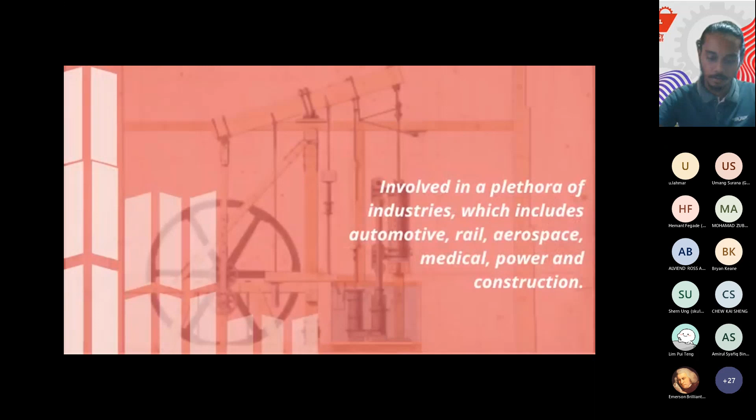Welcome to iMechie Nation. IMechE was established in 1847 by George Stephenson and has some of the world's greatest engineers in its history books. It is one of the fastest growing professional engineering institutions. Headquartered in London, we have operations around the world with members in more than 140 countries. We are involved in a plethora of industries, including automotive, rail, aerospace, medical, power, and construction. The Malaysian branch was incorporated in 1997 with the formation of a pro-tem committee with Professor Engineer Dr. Ong Kok Seng as the pro-tem chairman. Applications to the Malaysian Registrar of Society was approved in 2000 and the first inaugural meeting was held in January 2001. The branch has efficient business plans and a committee of dedicated volunteers to achieve the mission of the institution through the provision of networking, events, news, links with like-minded organizations, and opportunities for the local engineering community.

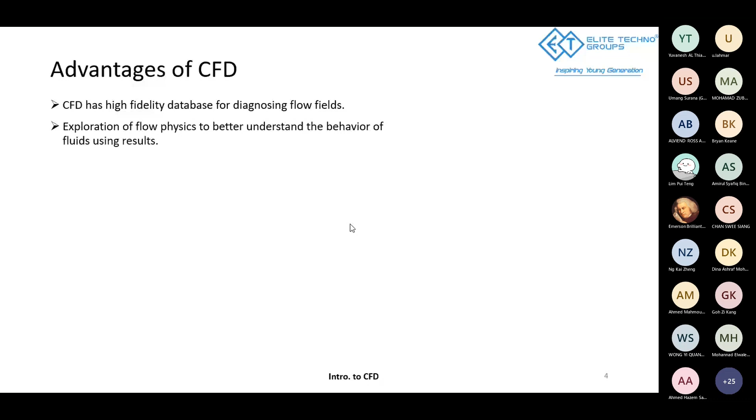Next is exploration of flow physics to better understand the behavior of fluids using results. Using CFD, you can explore different flow physics, from a simple example of fluid moving over a surface, to as large as Niagara Falls. You can actually simulate that extent of fluid flow and predict how the fluid will flow over a certain period of time, predicting the flow of the fluid in that domain using CFD. That is the extent of CFD. There are numerous possibilities using CFD. Whenever there is flow or fluid involved, there is CFD, giving you easier accessibility to better understand the behavior without having to invest a lot.

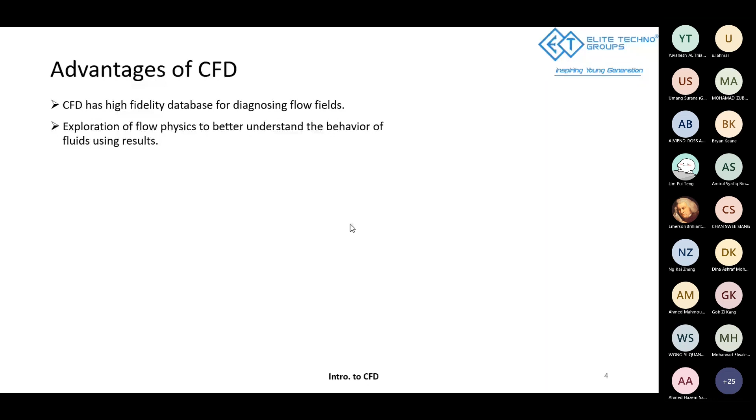Now, to understand this, let's take an example of fluid or air moving over a car. If a car is moving on a road at a particular speed, it will feel some drag or resistance from the air, which is called drag as a concept.

Imagine if a vehicle manufacturer does not have access to CFD. What he has to do is actually create a prototype experimentally, use a wind tunnel, place the vehicle in it, physically run the vehicle, and put sensors over the surface of the car to analyze on a real-time basis what the drag values or actual values are. Based on that, he has to remodify the design, recreate the prototype, and move ahead with this research until he reaches a satisfactory outcome.

But with CFD, you can just create a model of a car using CAD software, import it using a commercial software, and create this simulation. You can create a wind tunnel in the CFD domain and input conditions for your speed, where you can easily simulate and understand it with less time, less cost, and less investment of your own effort. It will give approximate results, but enough to understand the flow physics and how exactly the fluid is behaving.

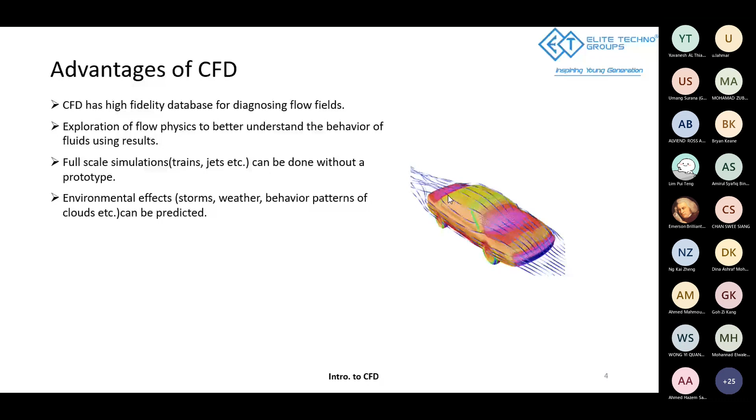Coming back to the other point I was mentioning, that is hazards involving CFD, EFD - experimental fluid dynamics, where you have to create simulation models and actually manually manufacture prototypes. You can avoid all those processes using CFD.

The major hazard is that manufacturing processes cause pollution or adverse effects on nature and the environment. This can be cut down by using CFD, where you reduce the process of remodification and redesign, and predict the flow behavior and outcome as a starting point to create your actual vehicle or component. That way, I'd say 70% of your hazards would be reduced by using CFD.

Now let's come to complex physics. Some of the complex physics, like movement of stars, planetary boundary layers, or stellar revolutions in space exploration - how a planet will move, how Earth will move with respect to the Sun in a couple of months, and at what position it will be - all those things you can actually predict using CFD.

You can actually create a small environment in CFD. You can actually create a domain in CFD which represents those properties. So that is the extent to which CFD goes.

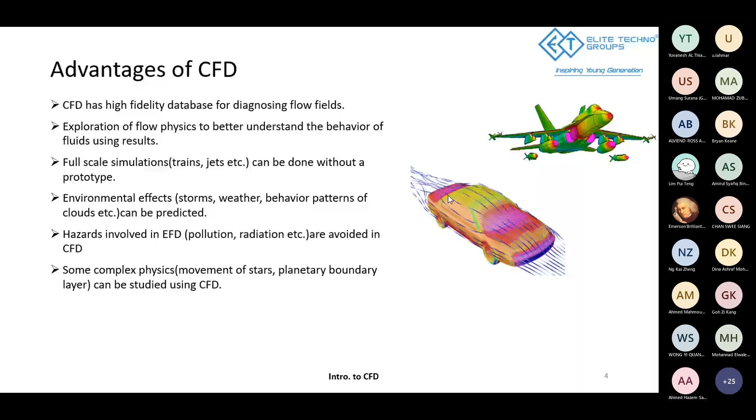Now let's focus on how a CFD code works and how a CFD algorithm is formed. The first step is that CFD codes are structured around numerical algorithms that can tackle fluid flow problems.

Different applications have different equations governing them. All these governing equations are categorized and generalized, and using them, different models are developed mathematically first. Then, using computer coding, these mathematical models are converted to computer codes which run using iterative methods to solve different fluid flow problems. They only need some input conditions for different parameters as a first guess, and iteratively they solve until they reach a conclusion.

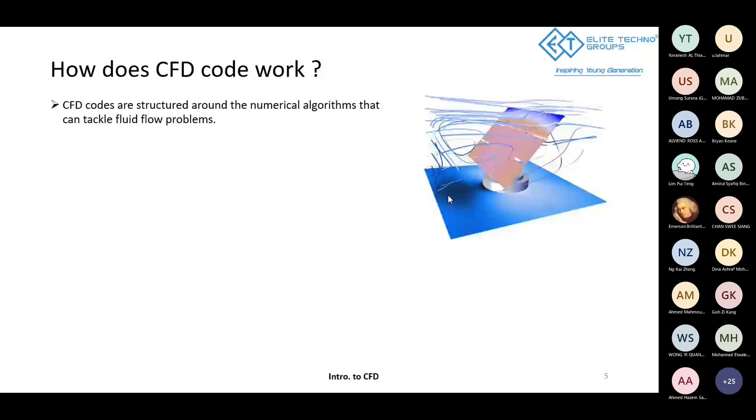Now, the analysis begins with a mathematical model of the physical problem. As I've told you, if you take a simple physical problem like heating of an object, it involves convection heat. Based on the nature of heating, it will also involve conduction. Based on different parameters of heat transfer, it will involve energy transfer, continuity, and momentum.

So all of these parameters will be analyzed. All of these equations will be applied or used to construct a mathematical model of the physical problem, which can accurately represent it.

Now, there's one small thing - we cannot exactly represent a physical model in the mathematical model, because there are a lot of parameters that vary in different ways. Like pressure, if there are entities that are time-dependent or compressible, it becomes very difficult to model a physical problem accurately using mathematical models. But we can model these physical problems to some extent by making assumptions and creating an actual model for that.

Then all of these equations must be satisfied throughout the region when a mathematical model is created for that particular physical problem. Apart from that, all these fluid properties are to be modeled empirically. It depends on what fluid you're using, how many properties you're analyzing, and what different properties you want. Based on your requirement, you will be able to apply these properties.

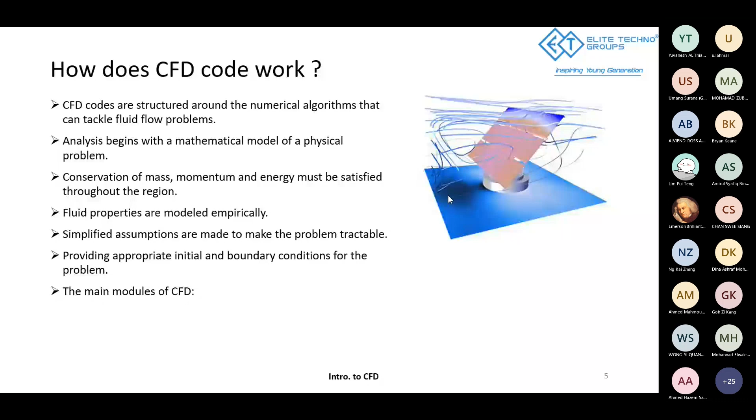So that is the primary idea of how CFD code works. After providing the initial and boundary conditions, the solver will solve and generate results for you, and those results will be the basis for you to analyze the problem and compare it with theoretical analysis, with theoretical terms, where you can learn.

Now let's consider the main modules of CFD. The first is pre-processing, the second is solving, and third is post-processing. Considering all of these processes, CFD is divided into these three modules, and we'll see with respect to a commercial tool how these models are considered, or how we can use this in a commercial tool, because there is a huge difference between going for commercial tools and developing your own code for CFD.

So those are two different things, and there is a huge gap, because for commercial tools you will have direct features which you can use. You can click on those features and they will be activated. The program will automatically run in the background, the back end of the system, and that way you'll have the solution. So using commercial tools, you only need to understand how the tool works in the back end, how, if I apply a particular model, how it will solve, and whether it will be suitable for my model or not. All of these things you'll take care of when you are actually going for commercial tools.

If you are going for developing tools, or if you ought to develop your own code for a particular problem that seems untractable, in that case you have to physically develop a mathematical model for that problem theoretically first, then convert it into a numerical model, and convert it into a Jacobian matrix, or a Gaussian matrix that defines that equation, and governs all the parameters I've spoken about before. Then, using those as input, you'd create a flow chart, write a code based on that, and run that code for your desired solution.

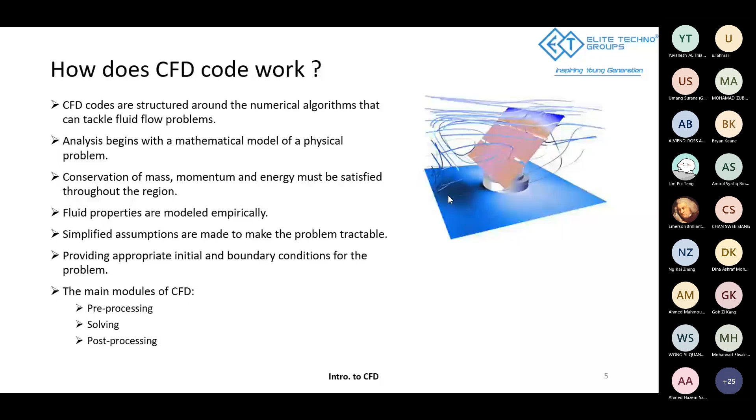So that was about that. Now let's jump into the CFD process. So CFD process in respect to commercial tool is covered as, you'd be first making the geometry using CAD software, or you'd be having a ready-made CAD geometry given by an expert, by the engineer or design engineer that is working with it.

Generally in industry there are different roles for different people. A design engineer works on a model, and he delivers that model to the analysis engineer. The analysis engineer takes the model, simplifies it according to his needs and the physical phenomena he has to operate on, repairs some of the contents of the model, and then does the meshing and all. So that's the context of things.

Now, first, for practice purposes, you'd be making geometry, then meshing the geometry, then setting up physics. In setting up physics, you'd be applying all the boundary conditions, setting up the whole case. Then in solution, you'd be running the solution in iteration and calculation by just clicking a calculate button on the commercial tool. After the solution is completely done by the computer, you'd go to the results for post-processing. In post-processing, there are different tools involved, which we'll see when we talk in detail about each of these modules.

So let's see how the segregation is done based on the three main modules: pre-processing, solving, and post-processing. In pre-processing, the making of geometry, geometry cleanup and preparation, and meshing are considered. In solving, the setting of physics and the solution part is there. In post-processing, based on your calculated results, you'll be creating data reports, deducing conclusions, and arriving at a particular solution to the problem you are solving. That covers post-processing.

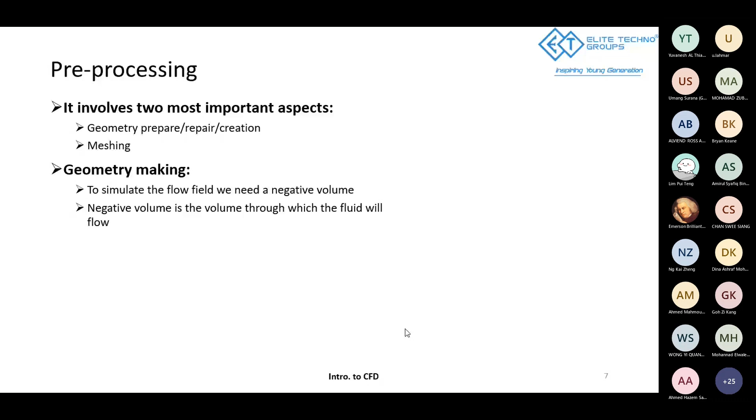Now, based on this negative volume, there are also two types of fluid flow. The two types of simulations can be set up during the geometry making itself. First is an external flow simulation, and second is an internal flow simulation.

For external flow simulation, you would have to create a box around this particular ship. So for this ship analysis, when the ship is moving over the waters, I need to understand how much resistance it feels when moving at a certain speed through the waters or through the domain. The bottom surface part is what I'm assuming is not actually in contact with the water, but in contact with air.

So I'm considering air as a fluid for my simulation, and I have constructed this domain to simulate this flow, where at this point will be my inlet, and at this point will be my outlet. My air will flow from this point and go out, and this basic consideration would be made while creating a domain and while making it visible. So this is done for external flows.

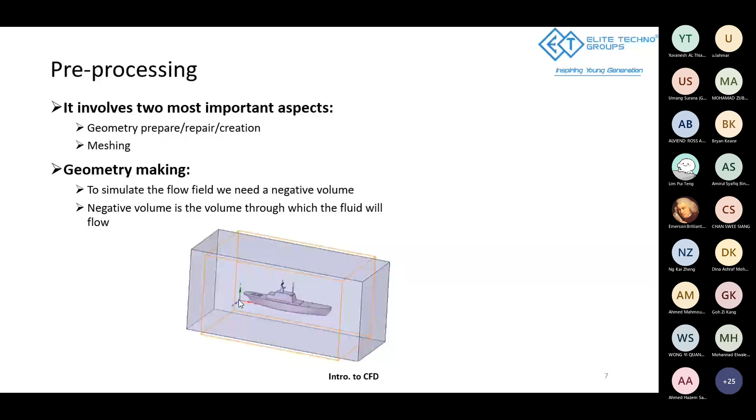Now, what is done for internal flows? If you are seeing this application for turbocharger, you'll be able to see that the fluid is moving inside a component, and there is also another component that is rotating, a rotating part of the component mentioned here. In that case, whatever the vacuum that you are seeing apart from this component, that is your negative volume.

Basically, that is your fluid volume, which you are going to analyze for, and which you need to extract while you're preparing for your simulation. Because essentially there are different factors associated with this when you are setting up this flow, setting up this fluid. You'd consider a few parameters like the structural wall of this inside component.

Only a thin surface of the structural component is considered for the analysis, and not the whole part, so that it's a surface which represents that particular component. The inside of the component is also not considered throughout the simulation, so it won't be affecting our simulation part. So while you are dealing with fluid, you'd be only dealing with fluids, and the geometry making is done in these terms. You'd be creating the geometry.

So basically, all these concepts you'll understand much more clearly when we go for our GUI session, and when we go in depth about our Fluent session, tomorrow's session for cooling fan study.

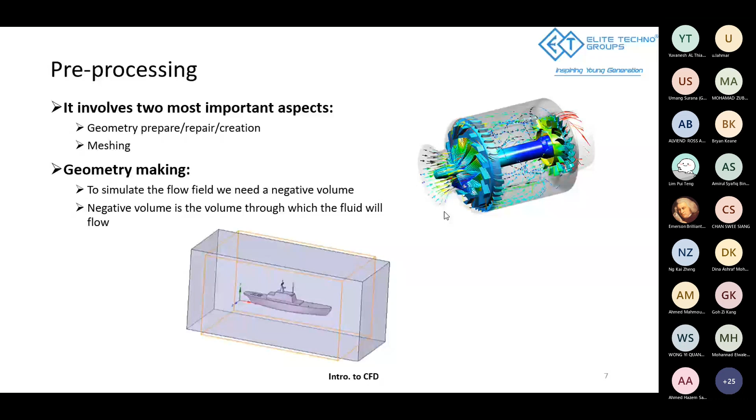Now let's come to generating a mesh. A mesh is basically, once the negative geometry, once the model is provided to the software, it is meshed through various processes. It's kind of dividing a particular model into different parts, and those parts are used to analyze a process. So the part of making these small elements, making a particular whole model into small elements, is what is called a mesh.

When generating a mesh, the only idea is that you'd be focusing on the controlling part of the mesh, focusing on the important region where you'd be having a denser mesh, and different components that make you interested, your regions of interest throughout the model. Even if you create a whole domain, you would have regions where your focus will be, where you'd be densing, creating these small elements in more frequency at that particular point, rather than focusing on the other parts of the model.

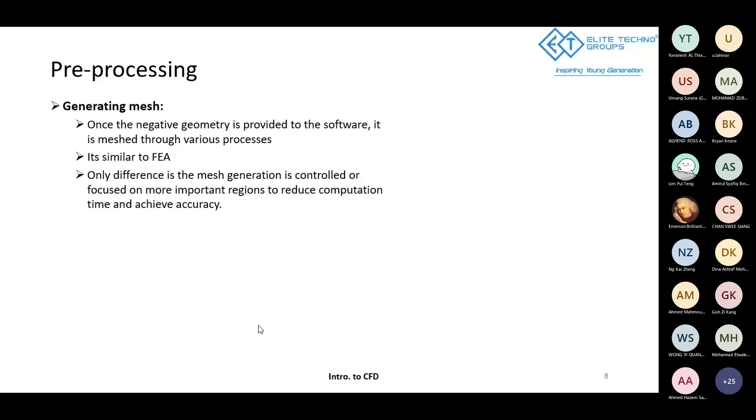To clarify this point in detail, you'll be seeing this 2D geometry of a car model. This is a surface where I have drawn this vacuum space for a car. This region is because I'm flowing it for external flow, and the solid part you're seeing is representing my fluid domain, where the fluid flow will be. My fluid flow will be coming in this direction and going in this direction. So accordingly, I have created the geometry, and I want to mesh it now.

So basically, on this surface, I will be creating small elements like this, as you are seeing, and at each of these elements, CFD uses the finite volume method, which treats these cells as volumes.

For 2D, it treats it as a rectangle, but for 3D, it treats it as a cubical volume. It will have a center point, let's consider this point. At center, it will have a node point at which it will be computing all the properties related to this particular section or element. This node will represent all the properties of fluid moving through this domain at that point for this small element.

Same thing will go for this element, and for this element. Using the reference of the previous element as a first guess, the solution for the next element will be calculated.

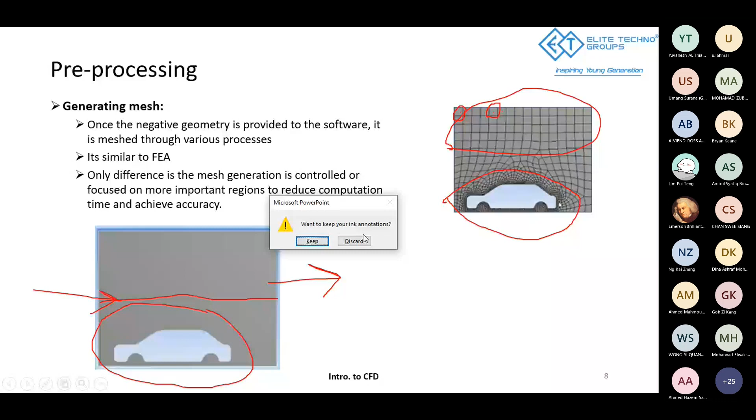This, by the way, depends on different analyses, different applications, and what outcomes are expected from an analysis. Based on that, the meshing strategy would be considered.

Now let's come to the solving part. The solving part consists of setting up physics and solution calculation. In setting up physics, you would have to apply boundary conditions to the meshed models. So whatever meshing you have done, to that meshing you would apply the physical constraints, like the solution equations for continuity, momentum, and the solution equations for turbulence if it is to be modeled.

Along with the boundary values, like what is the inlet velocity, what is the velocity of the wind blowing over the car, so something in regards to that we have to apply. Apart from this, you'd have to select appropriate values for boundary conditions that mimic the real life condition, such as if it's an internal flow or an external flow. Based on the application, you have to apply these boundary conditions.

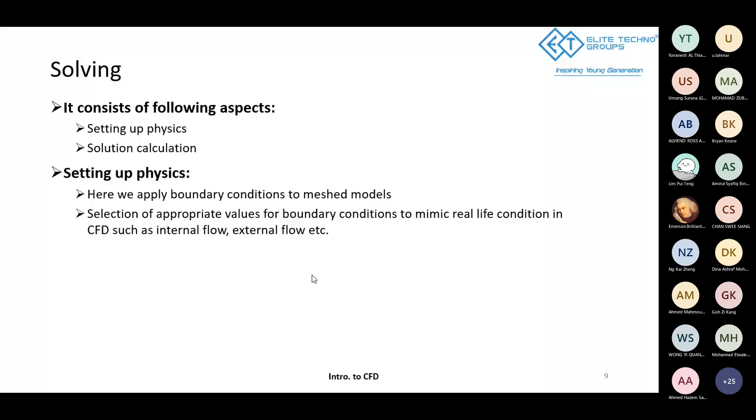Also, you can add conditions like if the flow is to be turbulent, or if you need gravity involved governing your flow, then you have to add these properties while solving. Some extra inputs might be needed to express the situation, such as when calculating for drag, you have to monitor the drag, or if you want to generate a specific level of drag, the whole simulation can be set up so you define a property which governs the overall simulation outcome.

So basically, if you are set on achieving a particular value for a particular component, you can set it, and based on that, the solution will run iteratively, solving for that value. But in that case it may take months, weeks, even years, because it's an approximate situation, and all numerical simulations give an approximate result. To obtain an exact solution is really impossible, considering all these parameters and the limitations we have with our physics.

Then you'd also be applying materials to the domain, setting the type of analysis, and defining the symmetry.

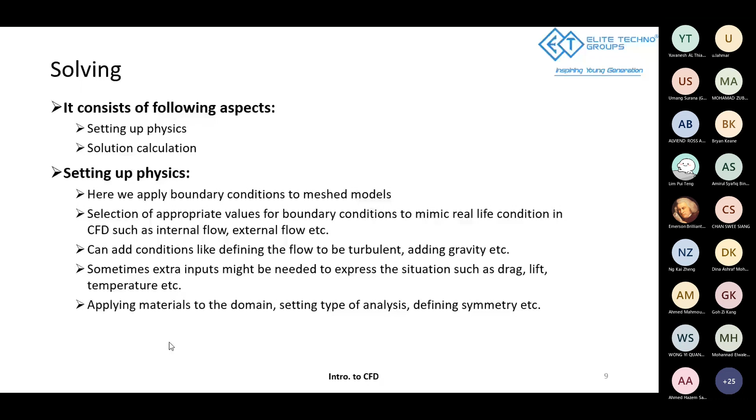Now, the solution calculation part. Here, selection of governing equations is done and applied to a mathematical model. Then convergence criteria is set up in this step. The convergence criteria basically means you're setting up an accuracy criteria, which if achieved, stops the iteration - because there are millions of simulations or iterations being done. So what governs when it will stop, in case you run a CFD simulation and are unable to stop it? To avoid those scenarios, there is a convergence criteria, which once achieved, defines your accuracy.

Convergence criteria is defined by two parameters. The first is the solution you get using two successive iterations. So if I'm solving for a particular property, let's say pressure, for the first iteration I get a value of 10 pascals - assuming you're familiar with SI units, or we can consider it as bar. For the next immediate successive iteration, it gives me a solution of 9.80 pascals or something, and similarly it goes on reducing at a particular point where the difference is very minimal between two successive iterations, within the limits of what convergence criteria I have set up.

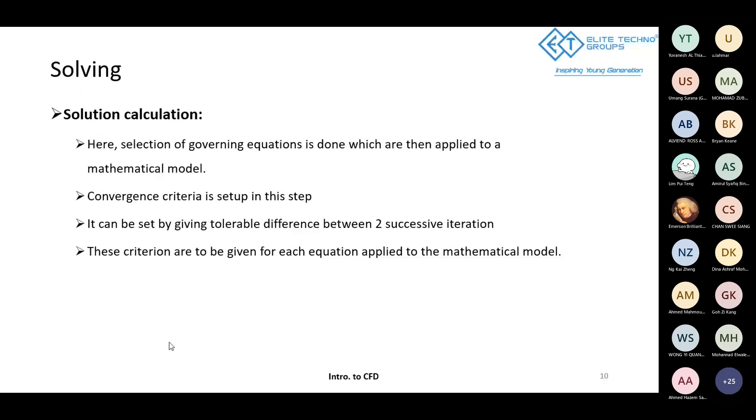Then you'd be setting up the maximum number of iterations. This is another limiter you add for avoiding an infinite number of iterations in a CFD solution.

When you apply maximum number of iterations, say 100, my simulation will solve for 100 iterations, solving the small tiny element we've seen until it gets the proper value. Based on the initial guess, it solves based on the number of iterations along with the step size. I'll come back in detail when we see the Fluent GUI. But for reference, imagine 100 iterations for this element, 100 for that, and if there are 100,000 elements, then 100,000 multiplied by 100 iterations - that's the amount of iterations the solution will solve.

If I add control over the step size, it will again multiply, and the solution iteration number will increase and skyrocket. This is why, for actual real problems, you get millions and millions of iterations to get accurate solutions, and it can take months or maybe years to get a proper solution. Now that was about the solving part, how the processor works. Let's consider the post-processing part.

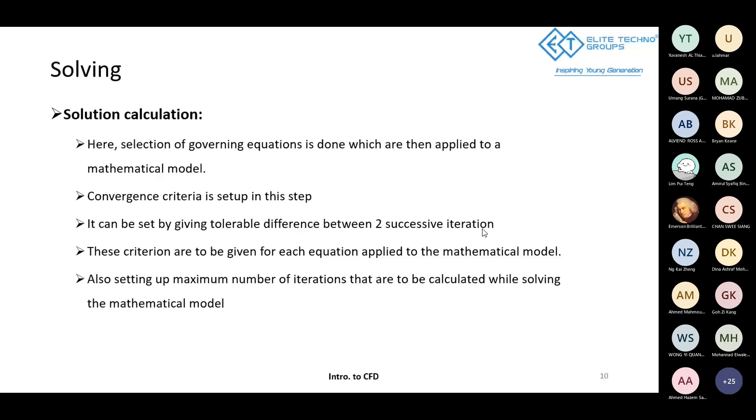In post-processing there is a very cool phenomena in CFD - it's also called colorful fluid dynamics because of this. All these commercial post-processing tools come with inbuilt graphics - they have their own color coding that represents the behavior of the properties, which you can actually visualize.

You can actually run animations and view how a particular particle is moving from point A to point B through the simulation I've set up. If you're doing a transient simulation, say of pump and impeller rotation, you can capture how the impeller is moving, and according to that movement, how the pressure, velocity, and flows are changing throughout the domain. I can actually visualize it.

The best part about CFD is you can actually see from your own perspective how the parameters are varying, whether they are accurate or not. That gives you a sense of satisfaction and achievement, where you've applied something and gotten a useful result out of it. There are other parameters too when you're going for post-processing.

Post-processing is usually done using contours and streamline flow paths. We'll be viewing contours and streamlines in the graphical parts of our GUI. For now, just take it as a reference, where it will only show you the color coding.

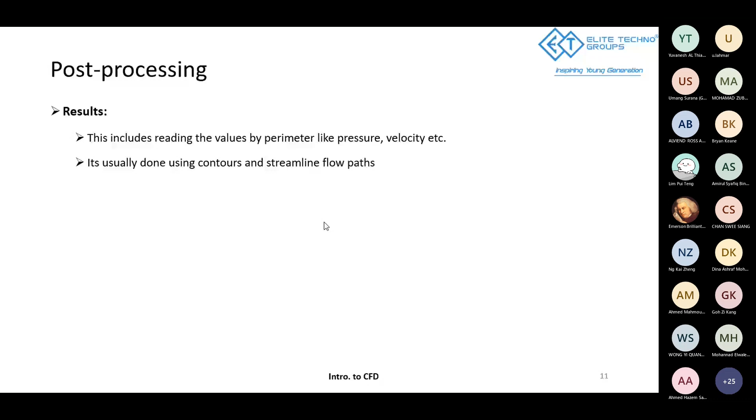But what about actual results? There are different function calculators based on the results you've gotten for pressure and velocity. You can use these function calculators to calculate, at a particular instance and a particular point, what pressure is acting there.

If it's a transient simulation, you can include time in that calculation, and at a particular time and a particular point in space, you can calculate the value of that parameter.

Based on this data, you'll have a huge amount of data that needs to be post-processed. That can be done using Excel, importing it for numerical calculation and post-processing, creating graphs, generating simulation graphs, and understanding whether performance parameters are within limits or not. All of that is an extension of post-processing.

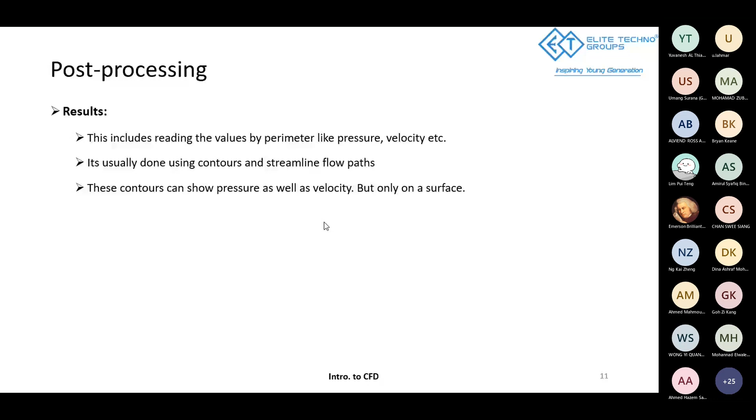But primarily, your post-processing is focused on whether your analysis is accurate or not. So let's look at this particular problem I was explaining throughout our journey of pre-processing, solving, and post-processing, to see what the outcome of this result is.

In order to minimize this vortex formation, you have to modify the design, the back-end design of the car, to reduce the eddies. Based on this analysis, you can revisit your geometry, make the necessary changes, apply all the constraints again, and compare your first analysis with your modified analysis to check whether the eddies are controlled and whether your simulation requirement is met. That's the extent of the car simulation, just one scenario I'm explaining.

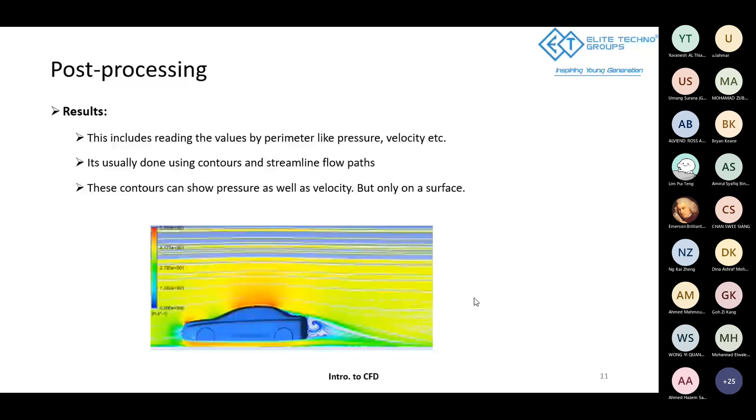So, in concluding this presentation, what we had seen is what CFD is, what the advantages of CFD are, what the working of CFD is, and the step-by-step procedure to perform a CFD analysis.

Now we'll be moving on to our ANSYS Fluent GUI. I have a video for you. For ease of accessibility, I've used this video to better explain the step-by-step flow of how the ANSYS Fluent GUI works.

Now, to consider the ANSYS Workbench and ANSYS Fluent GUI, you would first have to consider the ANSYS Mechanical GUI. So using this video, I'll just brush up on ANSYS Mechanical using a small part of it. I'll mention what the workbench is and how it looks, then move on to the second video where you'll see in detail how the ANSYS Fluent working is done.

So this is the primary ANSYS GUI. When you open your ANSYS Workbench, you would see these main modules. Your ANSYS Workbench is divided into four sections. The first is toolbox, the second is project schematic.

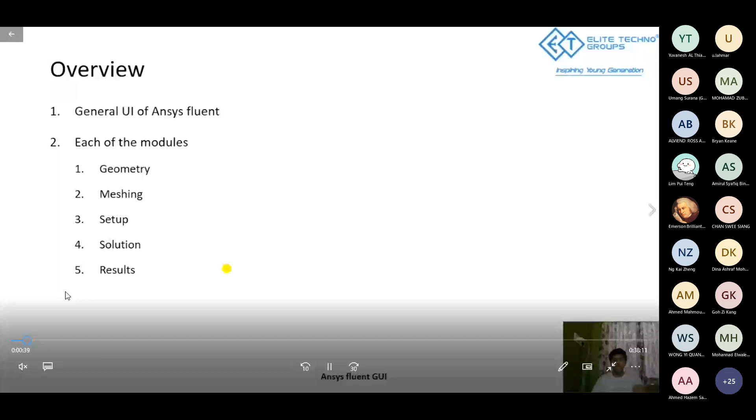Overall, you'll see each of these modules covered through this simulation tour, where you'll get a general idea of how the UI looks, and a general idea of what geometry, mesh, solution setup, the setup conditions, solution, and results mean.

Now, as I told you, in the different analysis systems, you will see at the left hand of the screen there are different components that are mentioned, like fluid flow blow molding, fluid flow extrusion, fluid flow CFX, fluid flow fluent. Depending upon the type and nature of your analysis, these applications, ANSYS has this feature where it has divided its coding based on application. It has used these commercial algorithms for different applications.

So Fluent usually deals with fluid flows that are simpler, having simpler physics, not more complex geometries. So you can simulate with that. And more prominently, it deals with some of the parts that are stationary. Most probably it deals with stationary parts. But if you have moving parts that are not that much complex, then you can use Fluent for analysis.

Otherwise, you can use CFX. CFX is a great tool for turbomachinery applications, or applications where it involves fluid and movement of different parts due to that movement of fluid. So using that, CFX is a little bit easier for handling moving part simulations. But Fluent also you can do to some degree, to some extent, but it has its limitations, and it will be much easier to do in CFX than Fluent. But Fluent is the baseline where you should start for your simulation, to understand all the essence of what analysis is. It's the best component to start with.

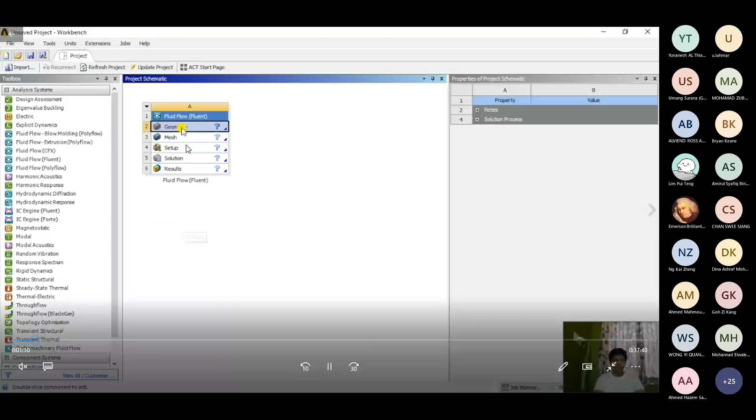Then you can rename your analysis over here, and there are different cells like geometry, mesh, setup, solution, and results. So using each and every single cell, you would be defining things. So each cell represents a tool, each cell represents its own software.

So for geometry, there are two different softwares, one is SpaceClaim, second is Design Modeler. For meshing, it's a Fluent meshing software. Setup, solution, and results has a unified software which operates on Fluent. So basically, setup, solution, and results is also called a Fluent software, or Fluent, in your component system.

So this is your analysis systems, and from dragging your analysis system, all of these interlinked cells are dragged. So basically, your geometry is linked to mesh, your mesh is linked to setup, your setup is linked to solution, and your solution is linked to results. So whatever changes you make in the geometry, all of the primary data will be directly linked to mesh through this analysis system.

Then you have component systems. So you can also drag these geometry cells as a standalone, separate tool in project schematic. Same goes for mesh, same goes for setup, same goes for results, because setup and solution go hand in hand, and it has its own combination of tools. So these standalone systems for your geometry cell, for mesh, are called component systems, components of your analysis system.

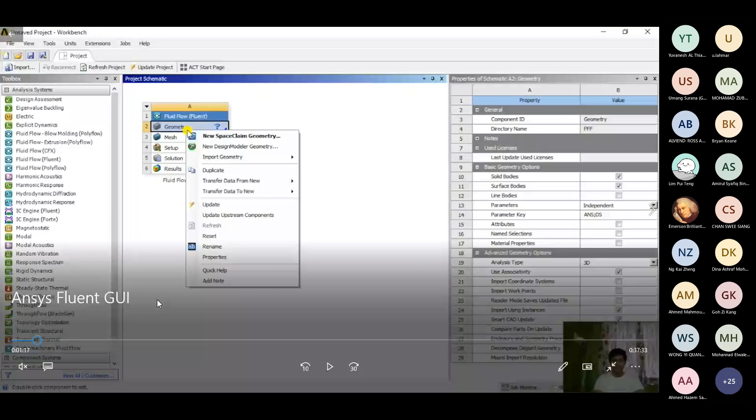So here we are seeing a fluid flow simulation through a pipe. For that, it's a simple simulation, so I'm creating a pipe geometry. Now always remember, when you are trying to open this software, as it's heavy and has system limitations for you, it will take some time to load up the software. So primarily we'll see the SpaceClaim, it's easier for operations, but there is also a Design Modeler thing you'll be able to see.

Now in this video, you'll be seeing that your SpaceClaim is open. So as this is the SpaceClaim GUI, where at the left you would see structure, it documents all the data.

It shows you what components you are editing, what solids and what are their names, and what are the properties of these components, the properties of the solids, design-wise speaking. Also, one property that is added is material-wise — you can also add material, you can also add phase at this stage itself, but it's advised not to add it because there's a certain process to be followed during meshing and setup in order for you to actually analyze it.

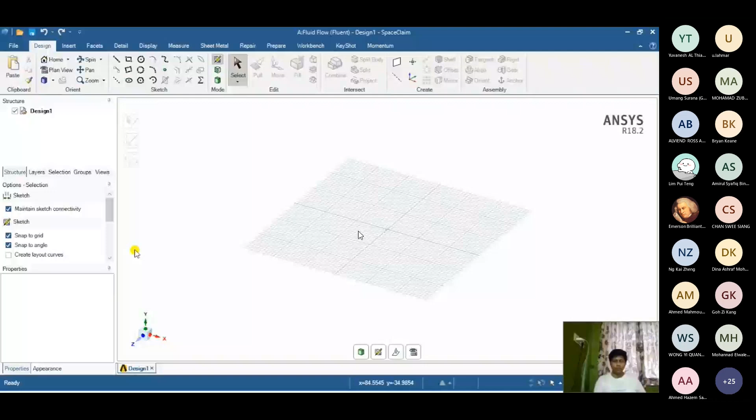That will eventually give you an error, so it's better to leave it unchanged, because in the general process I'm going to show you, it will be default and automatically considered. Now when you're seeing this schematic here, it will have your coordinate system representing it, and at the bottom you'll see the coordinate system mentioned for XYZ coordinates. Using some of these different features, you'll be able to easily move around and operate on these things. The first thing you'll focus on is the Orient tab.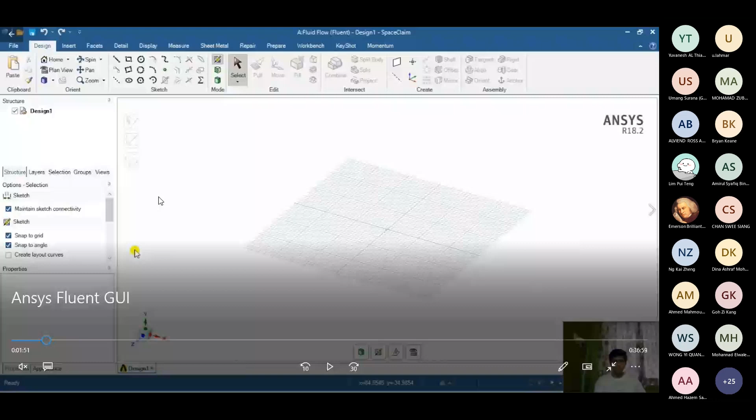So in the Orient tab, let me just forward it a bit. Yeah, so before we move on to the Orient tab, I'll tell you about the importance of the structure tab.

So in here, you can actually create different components, and to separate one model from the other, one solid from the other, as a different component, as a standalone component, and you can edit that component in that particular standalone component. This method is done specifically when you have multiple parts to be operated with alongside each other, when there are more than one parts — that's why we do this component system.

When you right click on the design, you'll see your component become activated — you'll see 'new component'. When you click on new component, a component below that design is created, and it's now highlighted, as you can see, it's bold. The bold means the component that is in bold is the activated component, meaning you are operating in that particular component. You can also create multiple components, and this way you'd be able to create the structure tree.

So when you are editing a particular component, make sure that that particular component is active, because when it's active it will only make changes according to that component, and not with respect to what you have on your screen otherwise. So make sure the component highlighted here is active on your screen — that it's actually showing on your screen for which you are applying the changes.

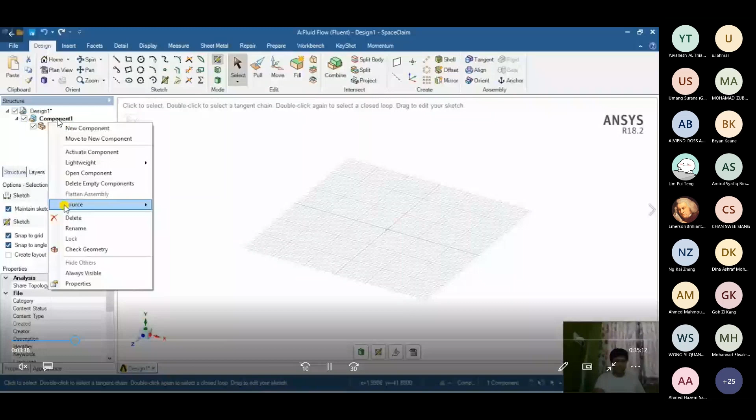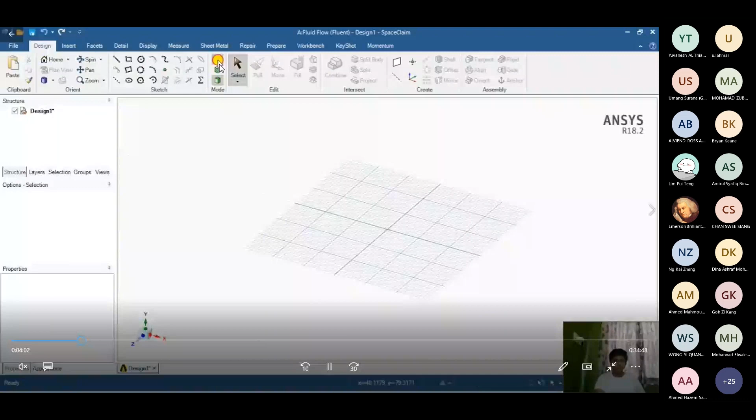Then there's the Orient tab, the Sketch tab, and the Mode tab. Primarily using this Mode tab, you'll be able to change your mode from Sketch mode to 3D graphic mode. You have to switch at the start itself from Sketch mode to 3D graphic mode to be able to select a plane on which you are going to construct your geometry, or edit your geometry.

Based on the selection, when you left click on your plane and click on plan view, which is mentioned at the top here, you'll be able to change the view with respect to that particular plane for your editing purpose.

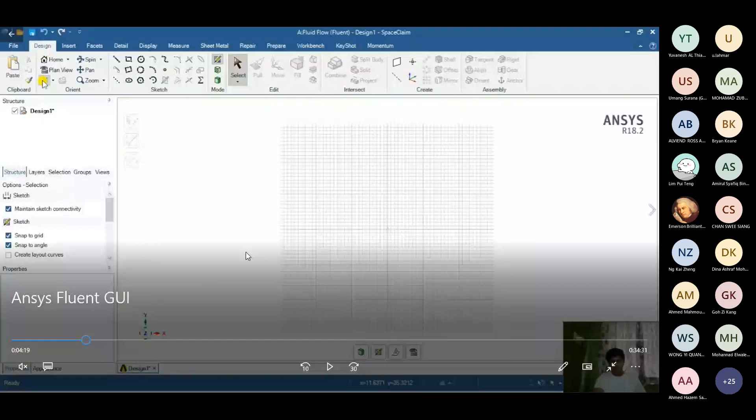So first we are creating a sketch, then we are going to create a solid model out of it. Its fundamental concept is similar to other CAD modeling software you might be familiar with, such as CATIA, Creo, or SolidWorks. The primary function of each of these components is similar — just the names might be different.

Now, when you click on this icon here, which shows an isometric cube view, it's to get out of the plan view or front view — the sketching mode — and move from sketching view to isometric view. Then you can change your mode from this Mode tab. There are three modes.

The first is sketch mode, the second is section mode, and the third is 3D mode. Section mode basically allows you to create sections at a particular plane that show how your geometry is edited from the inside. When you see the application tomorrow, you'll be able to explore it.

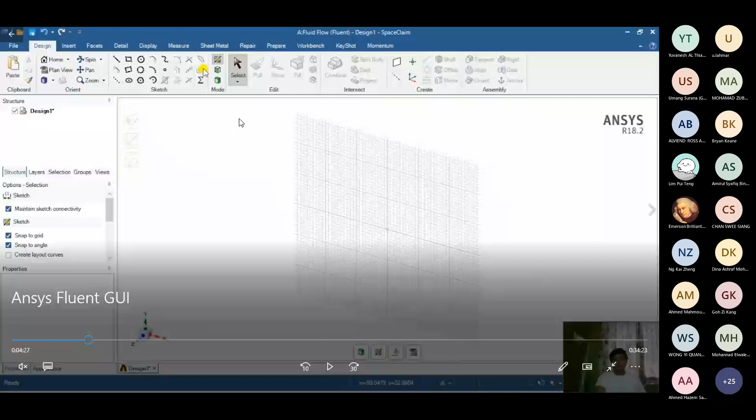So I'll be exploring more about these sections and showing you in detail about that. Now, when we are going to the plan view, as stated before, you would be using sketch geometries. You'll be creating the sketch. It's as simple as clicking a pre-designed shape.

As you are creating a pipe, you'll left click on circle, click anywhere on the point, preferably the center of the origin, and just drag your mouse anywhere. Due to the snap to grid and snap to angle, these two points at the left of your structures tab are active, so you would be able to drag it and move your cursor with these references of points.

Basically, this grid is created with 1 mm apart distance, and that will give you an idea for your dimensions, making it easier for you to adjust dimensions.

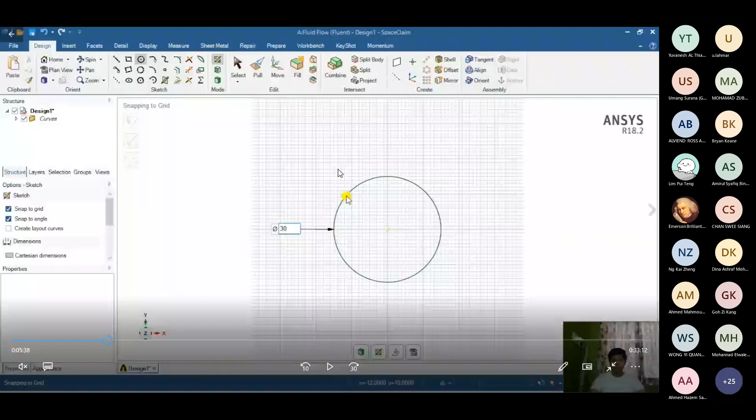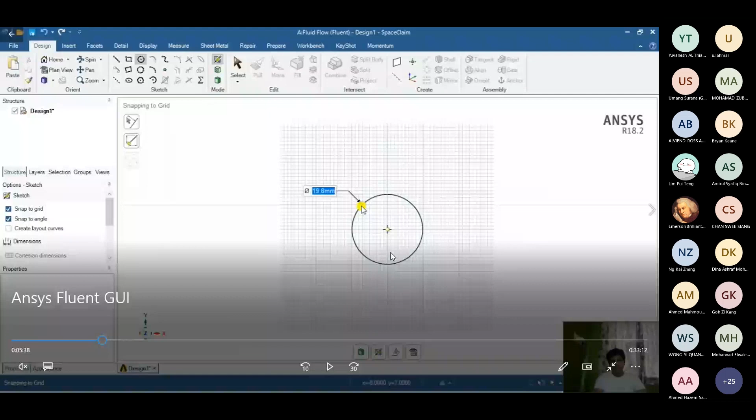Apart from other tools, this program has an easier accessibility where while you're actually dragging your mouse, you can edit the dimension right here itself. Whatever dimension you want to put, you can just put it as 30 mm or something, then click enter, and this particular circle will be transformed into 30 mm diameter, as this phi symbol represents diameter. So based on this, you can create the circle.

Now, once the circle is created, you'll be switching back to the mode, because we are only creating a pipe, and we only need this surface to be extruded into a pipe to create a model, right? I'm creating a solid model, but I'll give you the significance of why I'm creating this.

So to create the solid model from this, you'd have to select the... okay, but before moving on to the extrude part, just consider this part where we can actually move around the sketch, zoom around the sketch, and spin the sketch.

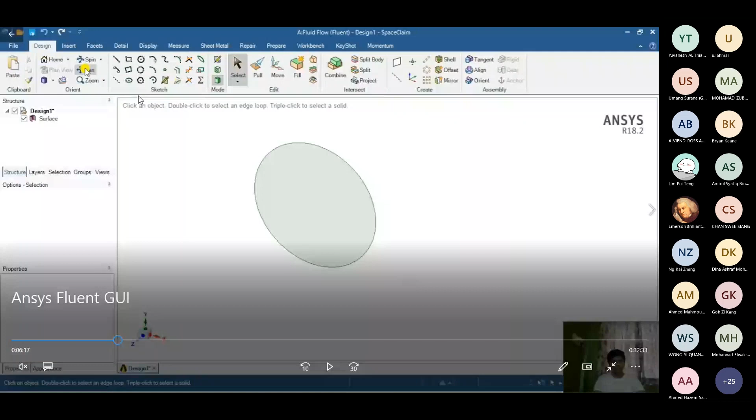Using zoom, you can zoom in and zoom out, as you have just seen. Using pan, you can move the particular body in a specific view, and using spin, you can actually rotate the body in a 3-dimensional coordinate system, as this is a 3-dimensional system.

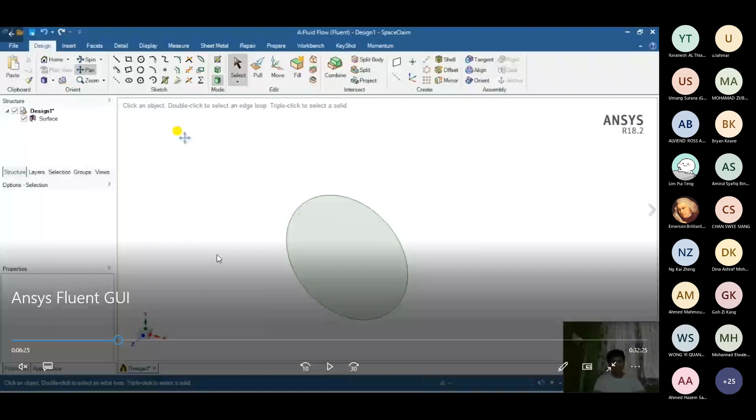Now here, if I just go back a little, I would then be moving on to the next part where I need to extrude. There is a pull option which allows you to extrude the surface. So a literal translation is used here while naming the option, that is pull.

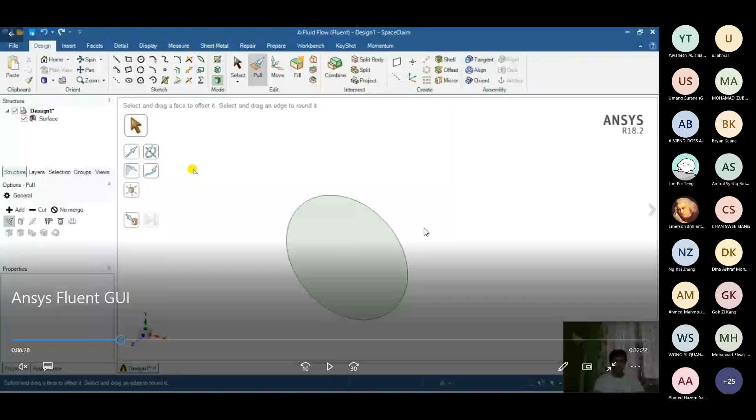So if I select the surface and pull it in either direction, the solid from that particular surface will be generated, and it will be created as it creates an extrude basically.

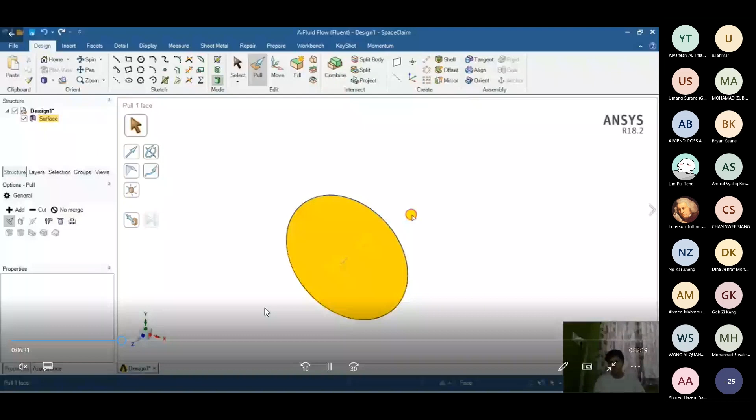In this manner, just as we have seen in the sketch, you'd also see the dimension part where you can edit the dimension. Let me just back it up a little bit. Yes, so here you'd see that you can actually edit your dimension while dragging your mouse itself, giving the dimension for your extrude right here.

Similarly, this is the general body that I have created, this is my pipe which I'm going to use. Now, you must be wondering -- I'm just giving a dimension of 40 mm for that particular thing, and I'll be adjusting this geometry now. Let me just fast forward.

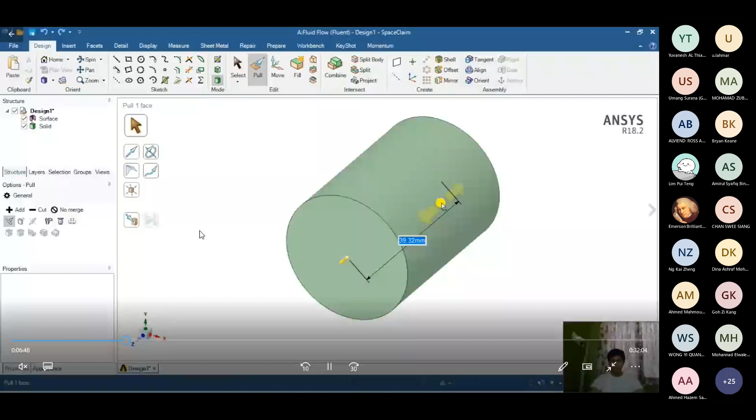Yeah, so now, as you can see at the left structure, below design there is a solid created, which is represented by this. Also, you can create your solids in this design itself, or you can create a new component, activate that component, and create whatever changes or model you're going to make in that component.

Now, I have created this simple pipe. This represents my negative volume of pipe. This actually represents my fluid part that is going to move, that is going to be there throughout the system, through the pipe.

So there are primarily two approaches for your analysis that were mentioned. I didn't go in quite depth into those approaches. One is called the Eulerian approach, and the second is the Lagrangian approach. You can also explore by yourself what those are. Using those approaches, the primary understanding of CFD is made, that we'll be using an approach to analyze through the volume of the fluid rather than analyzing a singular particle through the domain.

So when I'm considering this pipe, I actually have disregarded my pipe geometry. I've only considered the inner volume of the fluid. So this is called negative volume.

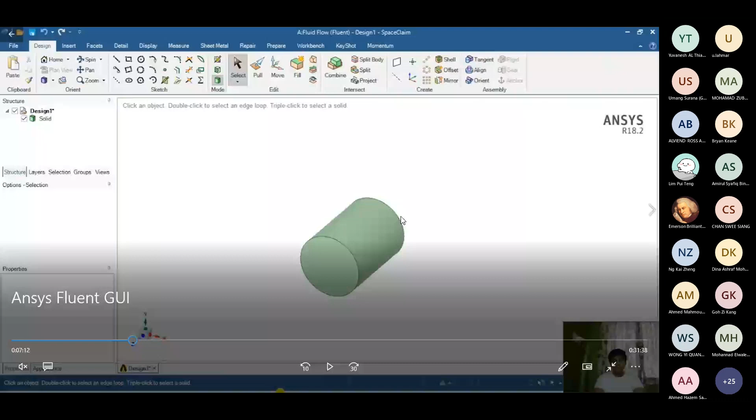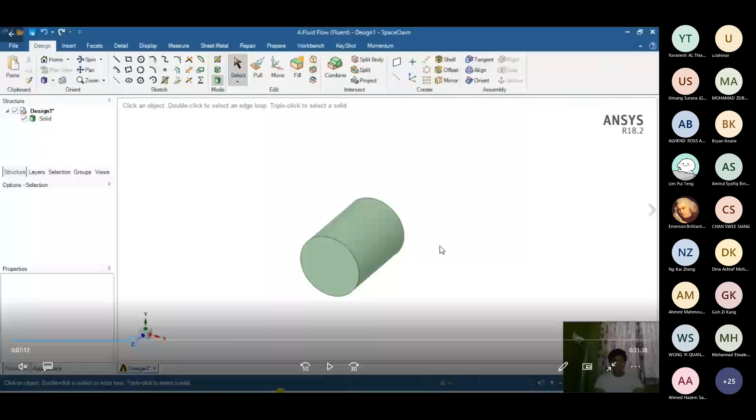Now let's move on. My geometry is complete, so I'll be closing this domain, and I will be going back to my workbench. So now, as you can see here, my geometry is complete, so it shows me a green tick.

Other domains, for meshing it shows the refresh button, and for setup, solution, and result it shows a question mark. The reason it's showing the refresh button for mesh is because geometry is linked to mesh. When your geometry is complete, using an analysis system, all of these components are interlinked and dependent on the previous one. So it's asking me to refresh my mesh, so that I can move forward with the setup.

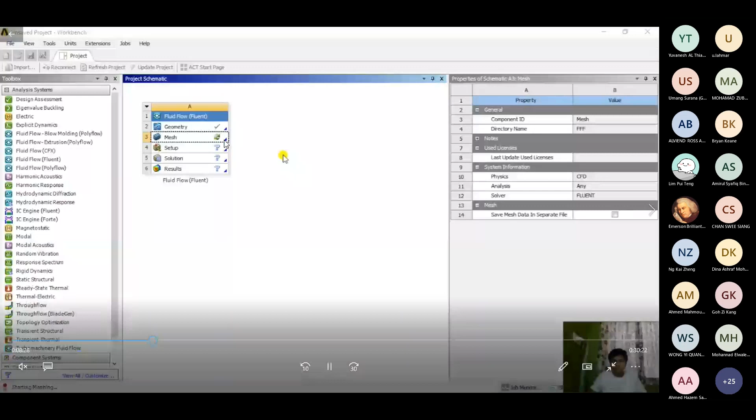Now for meshing, similarly, I will either double click the mesh, or right click and click edit to move into this mesh domain, or mesh GUI. So this is the mesh GUI. Here also, on similar lines, every single tool is preferred, where the top part represents all the different features, the left part represents the outline or the tree, which you have to take as a reference. There is a third component, this big blue graphical component, which shows what changes you are making graphically.

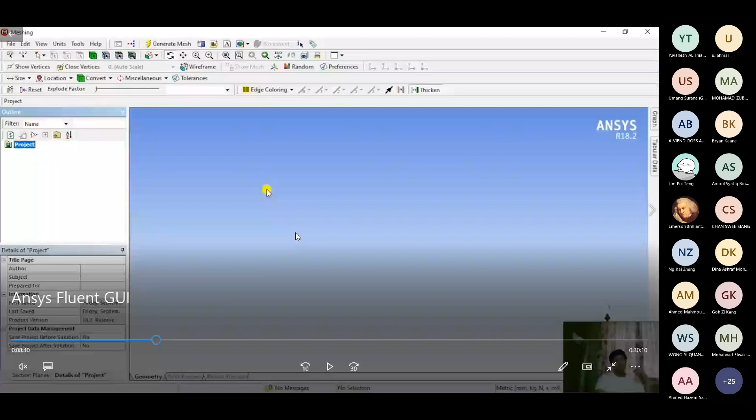Now we are waiting for the geometry to be attached to this mesh. As I told you, when the geometry is attached to the mesh in the ANSYS workbench, it was not completely attached, it's just linked. That means the input data, when you're actually opening the mesh, only then will the software try to process the input data, to avoid wasting computational resources, and that's how it will generate the mesh.

Now, when in mesh your geometry appears or is attached, it will show your geometry directly, and at this outline tree you would see your model, geometry, coordinate system, and mesh. All of these properties are default defined, actually imported from the SpaceClaim software, taking the reference point of the origin of that world, of that simulation interface, and using that similar reference, it has imported over here.

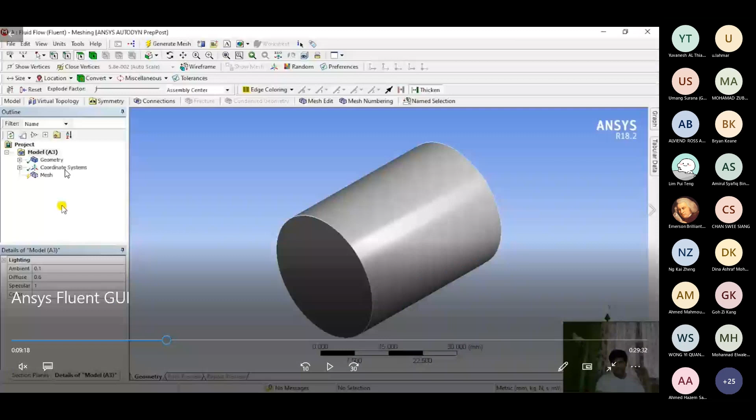Now in mesh, basically we are going to just divide this domain into small elements by creating the mesh domain. Now when I click on mesh, I would see these different options like insert, update, generate mesh.

From my primary analysis, any kind of analysis, you would go for single term analysis, where you simply generate mesh without changing any parameters to see how coarse it is, how many mesh elements are generated, and how accurate the result is from that generated mesh. That will act as your reference point where you can judge your mesh to improve accuracy, modifying it as a baseline, reducing the element size.

You are solving for more elements, so essentially your accuracy will increase, because due to the smaller segregation of elements, whatever properties are going to be simulated through those parameters on that infinitesimally small element, it will capture more accuracy for your fundamental simulations.

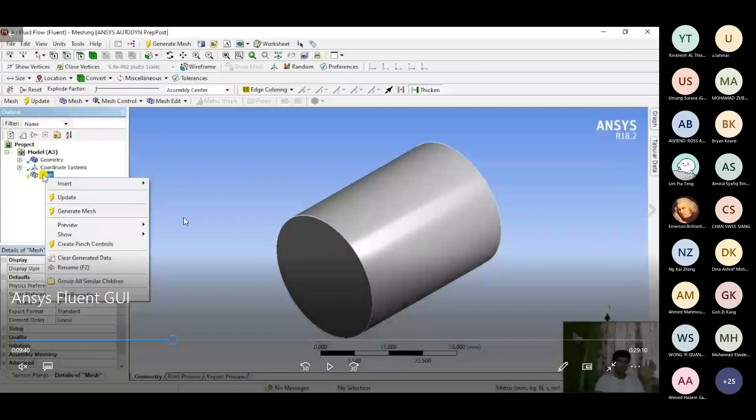So while meshing, your first reference point would be to just click on generate mesh and see what is generated. At the left bottom corner, details of mesh will be displayed, where you'll see display, defaults, sizing, quality - all different parameters with which you can change your mesh.

You can change your mesh size, your element size, and even check the quality of your mesh, which is another concept in itself in computational fluid dynamics. This gives you a basic understanding of whether your mesh and settings are going in the right direction, and will give you some idea of accuracy too.

But that will come with experience, when you are more prone to doing different simulations. When you have done like 10-15 simulations, only then will you have that basic understanding of how to adjust the mesh and how these small parameters affect accuracy. For now, just focus on the generate mesh part.

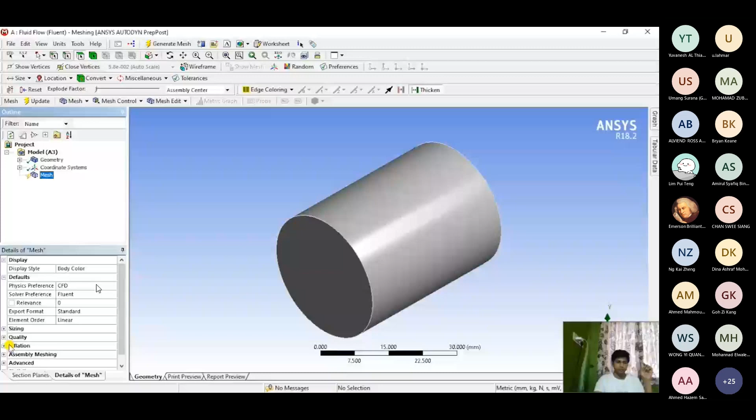For direct generating mesh, the software takes it as program controlled mesh with default settings. But there are actually manual controls given here, in mesh and mesh control, where you can actually add mesh, and in mesh edit you can use this option to advancedly edit meshes.

Now, as you can see here, my domain is divided into small elements. So I can check this below - if I scroll this details of mesh scroll bar down, you will see statistics showing the number of elements, mesh count - basically the number of elements generated through this mesh.

There is one more important thing in details of meshing sizing. As you can see, the size function is curvature, the relevance center is coarse - that means this is a very coarse mesh. For explaining purposes, I'm just keeping it as coarse.

But for actual analysis, you would have to change these parameters to decide whether to keep the default minimum face size, default maximum face size, or change it according to your dimensions. Your understanding of dimensions is also important for generating the mesh, because if your model is 1000 mm and you give it 1 mm as smallest face size, then that's the minimum requirement for element generation.

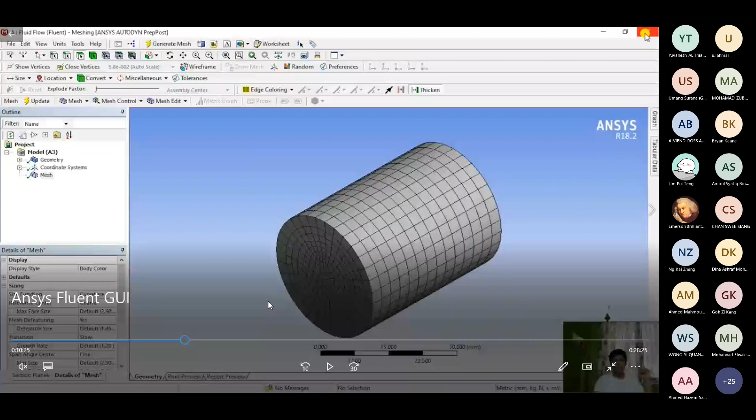Now let's move on to one of the important things. So my mesh is generated. Now I have to give named selections. The primary idea behind giving named selections is to define a boundary, to give a name to a boundary.

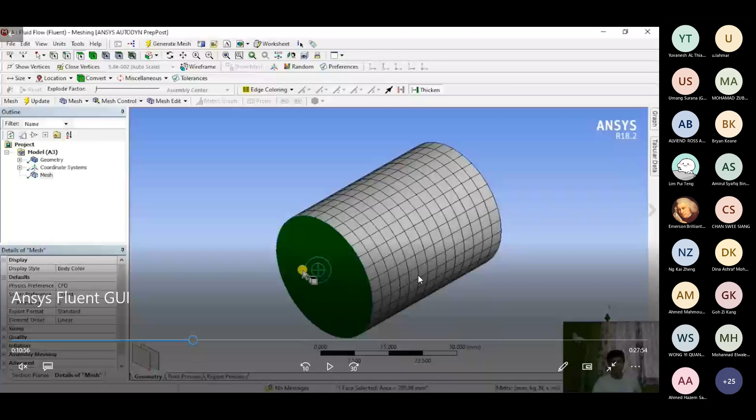So if this particular face that is highlighted in green right now is my inlet, then I have to give it a named selection as inlet here itself in the meshing domain itself, because it helps us identify during setup that this particular face is an inlet, this particular face is an outlet, because as it's a simple geometry, it will be easier to identify. But when the information translates to setup, it's better to have the information on our terms, like what face is defining which boundary condition, and then based on that you would be able to translate it better.

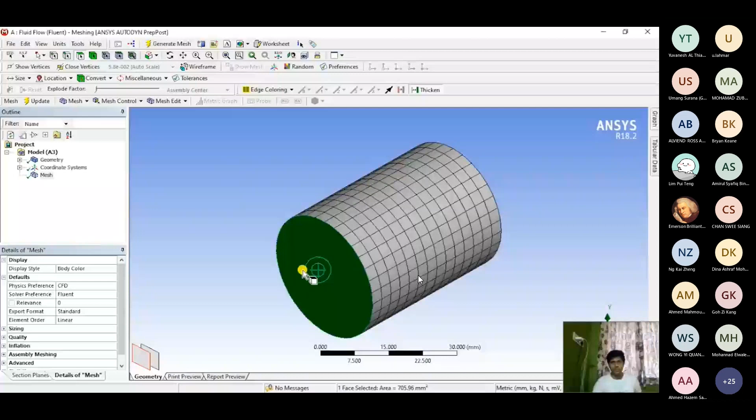So here there is an option called create name selection. As you can see on the screen, it's highlighted, create name selection. Using that option, you'd be able to see this window will pop up, and you'd be naming that part or that surface as inlet. One more important thing, when you are trying to name it, at the top corner you'd be seeing that there are different options.

So where my arrow is highlighting currently, it is representing vertices. So if this feature is on, my cursor will only select points or vertices through this domain. Then the second option is edge. If this option is on, then it will only select edges. As you can see, this surface option is on, it's pressed, so it's only selecting faces. So that is also an important part.

So you have to first click on faces, and then you have to go ahead with the create name selection to create the name selection. And also you have to name the selection appropriately, because some of these inputs like inlet, outlet, wall, these are default and already preloaded in ANSYS Fluent.

So ANSYS Fluent understands this. So if you give inlet, outlet, it will appropriately apply limiters to these surfaces that are default limiters in order for your simulation to go smoothly, and due to that it will help in your simulation, resulting in lesser errors when you are applying. So make sure that you are giving it in small cases, all lowercase, and you are mentioning the name as inlet, outlet, wall based on that.

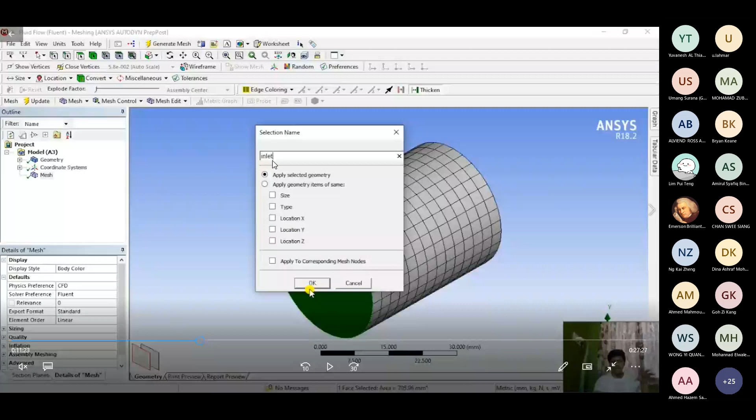So once I have done this, I would be going ahead with the second part. So for the second part, I would be rotating. So yes, again, there are these similar terms, which is revolve, pan, zoom in, zoom out. So these are options. Their looks are different, but their prime objective is the same.

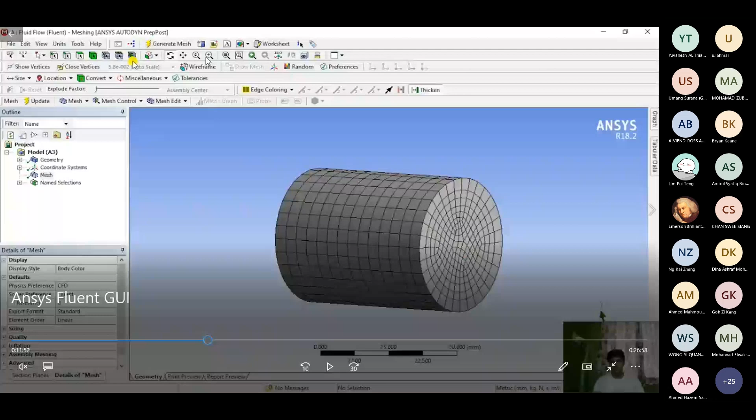So if you had worked with some CAD software or any kind of simulation software, then you must have the understanding of how these operations work. So all the operations are the same, just the titles and names are different. Same thing I'll be doing here.

I will be creating a name selection. I'll be giving the name selection as outlet for this face. I'd be giving the final face, that is the wall face, and I will be defining it as wall.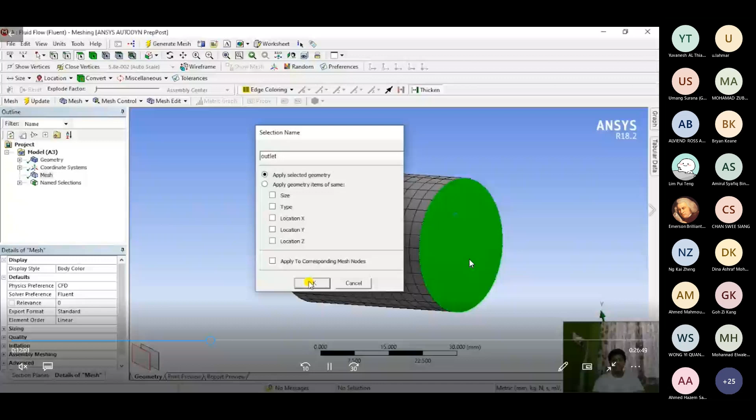Now at this point, my name selections will be shown in the outline as inlet, outlet, and wall. And if I click on the right section of the outline, if I click on wall, it will show it in red. It will represent that this particular surface is named as wall, and its history and details are mentioned over here, like what you can check, the color coding, etc., the representation.

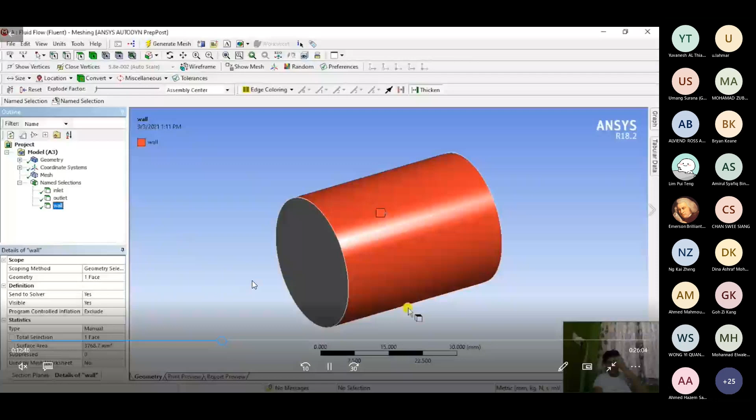Now comes the part where, the most important part after you are done with your mesh, is updating your mesh after creating your name selections. Why we need to do that is because when your Fluent detects inlet, outlet, and wall and all these name selections, it detects that inlet, outlet, and wall are applied or applicable to fluid flows.

That means whatever domain I have in front of me is a fluid domain. And when you update your mesh with name selections, it will automatically update the nature of this model from solid to fluid. And all of the translations will be done to fluid from this point itself, so that you don't have to manually change the nature of this model to fluid.

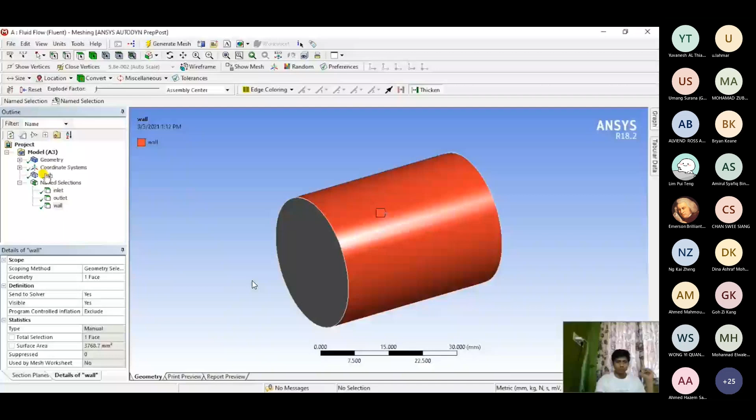So you can either right click, or you can see at the top here there is an update option where you have to click update, and then sometimes you'd see this information pop up. This pop-up is also called a message box, which I showed you in ANSYS Mechanical and ANSYS Workbench. The same message box is carried forward to all of these different models or components.

Here it's hidden for now, I've just hidden it, but eventually a pop-up will come up. As this is a positive pop-up, that means there is no warning or issue. It shows me that the mesh translation to Fluent is successful, meaning my solid model, my meshed model, my divided elements, are now fluid components.

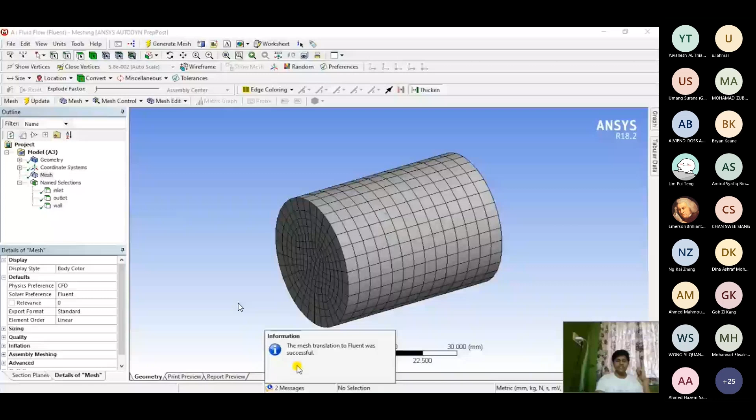So even if I double click that, you'll see in detail the info and warning. Here you'll see the warning that all cell zones in Fluent may be automatically set to fluid. The reason is simple, because I've defined it accordingly.

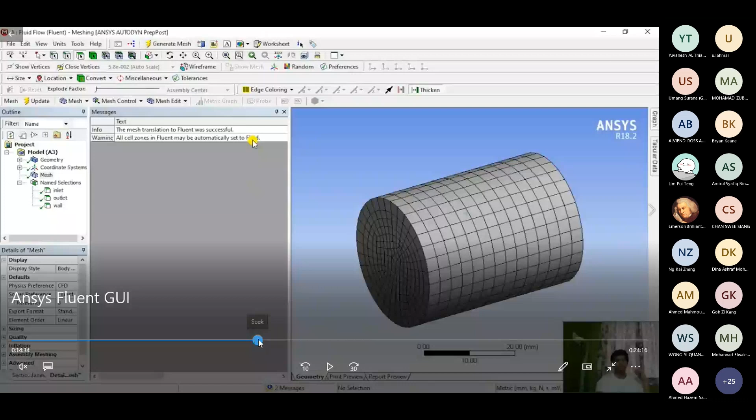Now coming to the next part. After exiting the mesh, I'll just close the mesh from here, and now my mesh is also showing a green tick. And now my setup is showing the refresh button. So this is generally how it goes, this is the flow of the analysis.

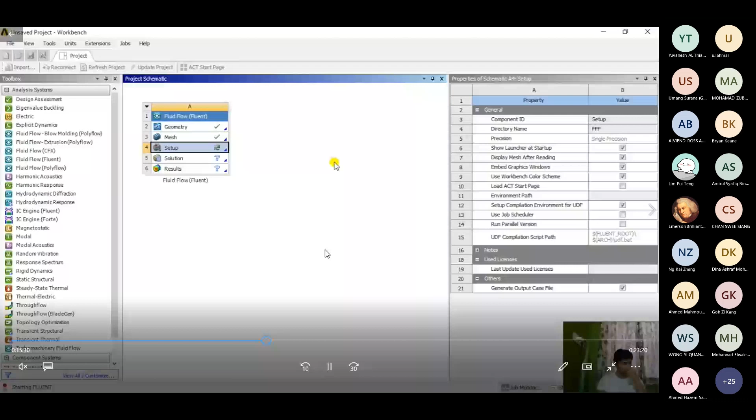Now right click, edit, and your setup will open where your linked geometry and mesh will be connecting. So before you move to the setup part, you would have this pop-up which basically shows you to choose either of the options.

One option shows the dimensions, the nature of the model. It's 3D, it's pre-selected, and not changeable because it's taken from the reference of the geometry and mesh. Second, there are different display options mentioned, like display mesh after reading, workbench color scheme, and so on.

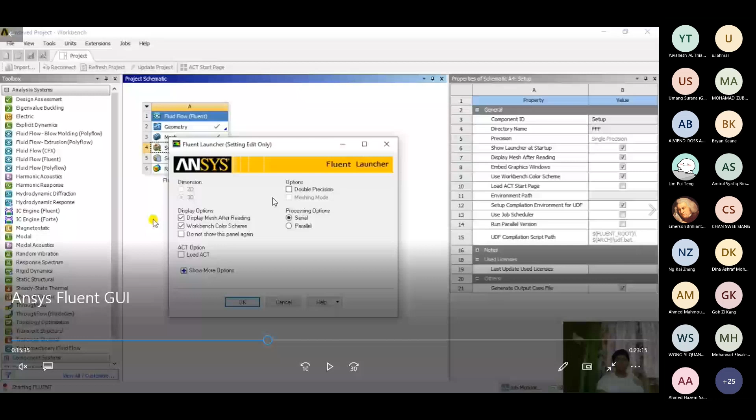Also, the main option that you are going to work on, that you always have to click, is double precision. That means all of the iterations or settings that you apply are checked with double precision, and all iterations will be done using double precision. That's why your processing option should be double precision.

And in your processing options, you will have two types of options: one is a serial option, one is a parallel option. So in this option, you would select either serial or parallel.

For simpler simulations, you would select serial. For heavy operations, you would select parallel. This generally depends on the extent of your computer system, how many cores you have. Like if your system has 8 cores, 16 cores, 32 cores, or 4 cores - quad core, octa core. Based on your computer or system specification, you can choose either one.

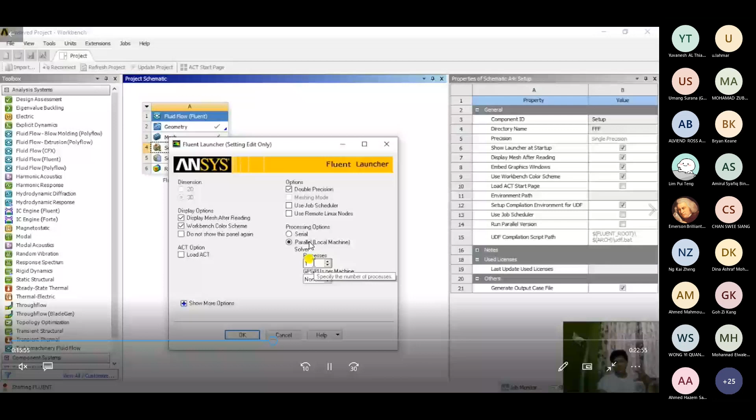So here I'll be choosing parallel, and I'll be changing the number of processes to 4, because my system actually has 4 cores. It's a quad core system, so I'll be using 4 cores for parallel simulation, and click OK.

When I click OK, it will show me this system GUI. It's still loading. Now, after loading completes, you'd see this GUI for your system setup physics.

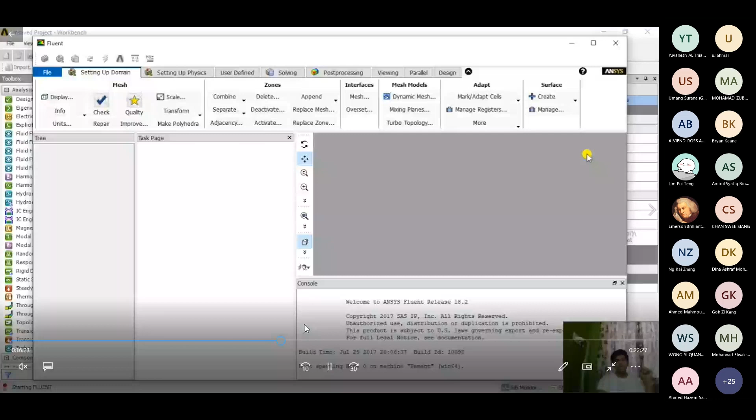Here you will have a lot of parameters to take care of: general, models, materials, cell zone conditions, boundary conditions, dynamic mesh, and reference values, which I won't be covering. Solution and solution methods, how you can change methods. Controls is the advanced part. Report definition monitors is the advanced part.

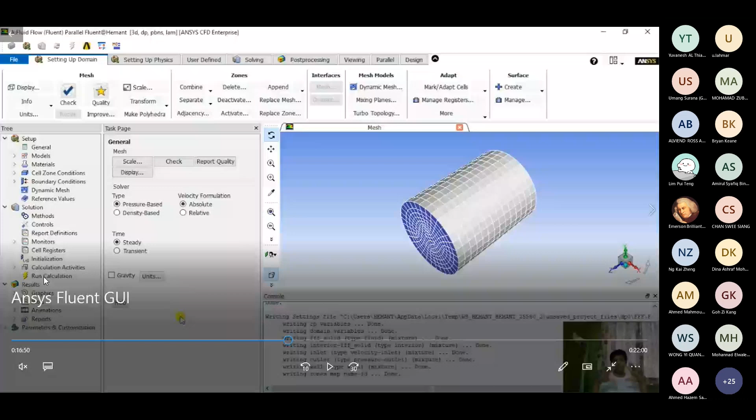Then you would see the initialization, then we'll go for the run calculation, and actually compute for a certain number of iterations. So let's see step by step how we apply these conditions, and what it means in the sense of your laminar flow simulation. In general scale, you would see - let me just fast forward it to here.

In general, you would see mesh check options like scale check, report quality, and display. Here you can check your mesh quality and your aspect ratio. These two terms are advanced - once you're getting the hang of it, you'll slowly learn and understand them pretty quickly. As we have a time limit, I won't be discussing these details in this session, but in tomorrow's session I would give you some small context regarding tomorrow's simulation.